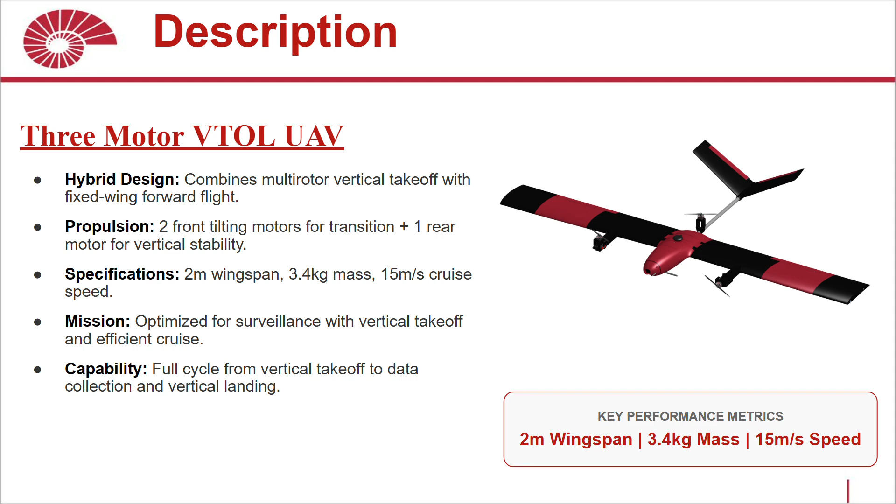Our mission is optimized for surveillance with a vertical takeoff and efficient cruise. Our capabilities are the full cycle from vertical takeoff to data collection and vertical landing. So here you can see our finished prototype within the lab of KU AVA at Koç University.

Our goals are stable and controlled flight, which we have achieved, and 20 minutes of endurance, which was partially achieved. We have achieved a 5-minute flight with battery usage of only 13%, which implies the capability to fly even more than 20 minutes. Total mass below 4 kilograms, which we ended up being 3.4.

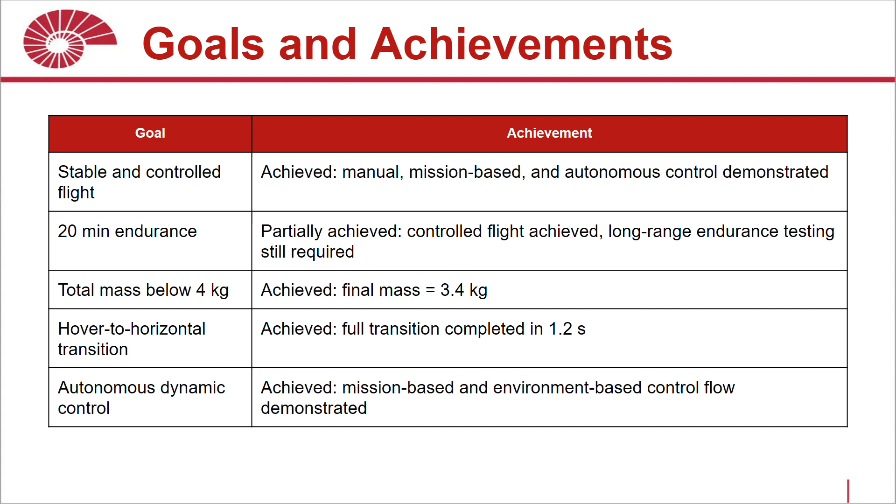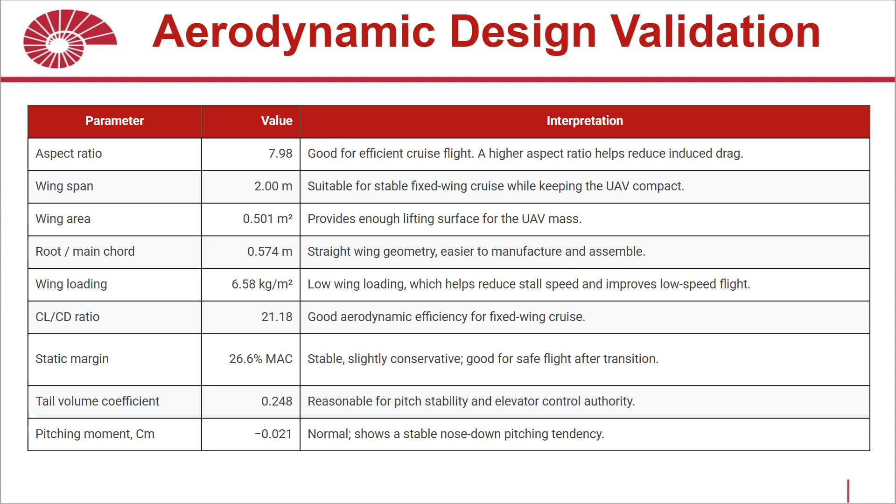Our aerodynamic design validations: our aspect ratio is quite on point, while the static margin is quite high, but at the same time, it provides a more steady flight, even though less maneuverability.

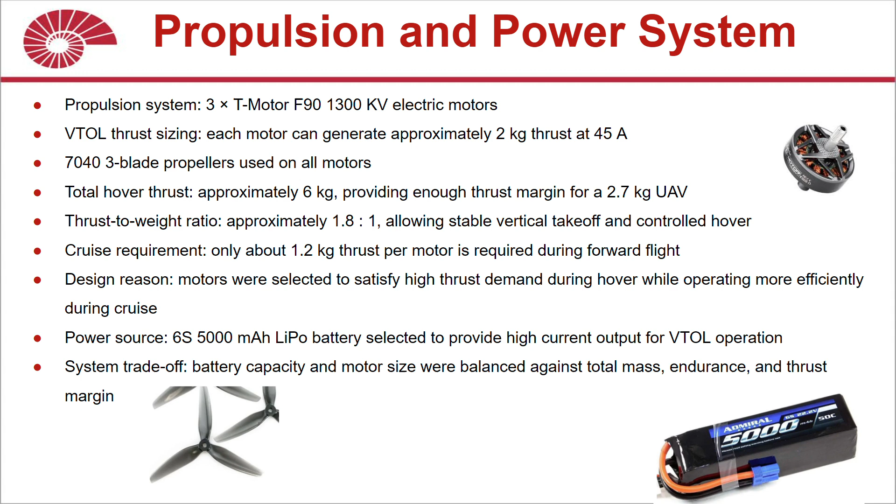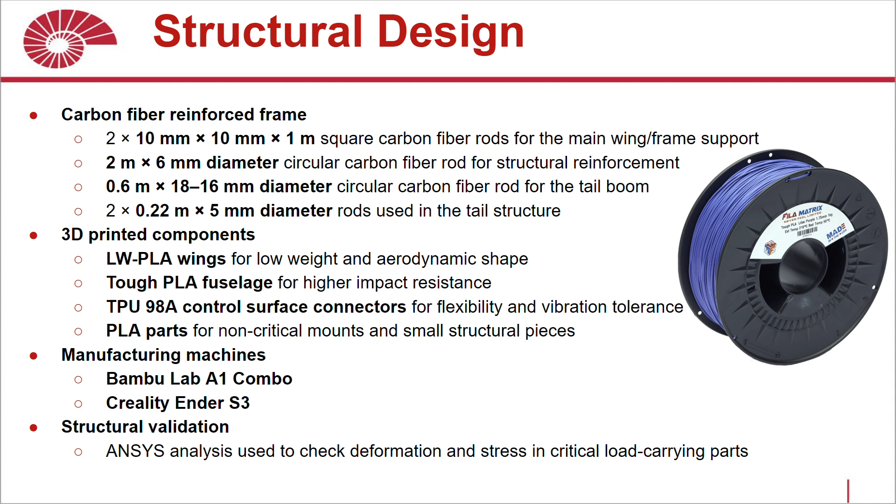Our structural design: we have used multiple different types of carbon fiber reinforcements, 3D printing filaments and components, manufacturing machines and structural validity. Everything was used with respect to their advantages from the engineering perspective in order to allow us to cut as much weight as possible and still obtain safe structural integrity within the plane itself.

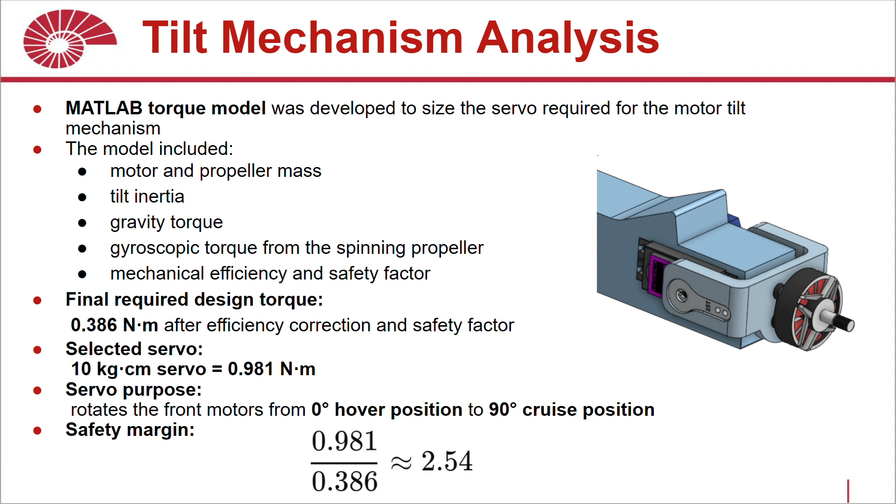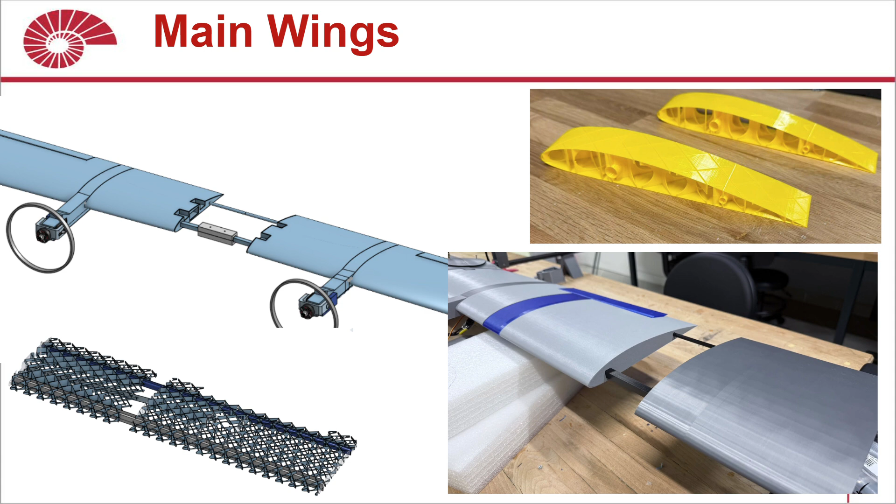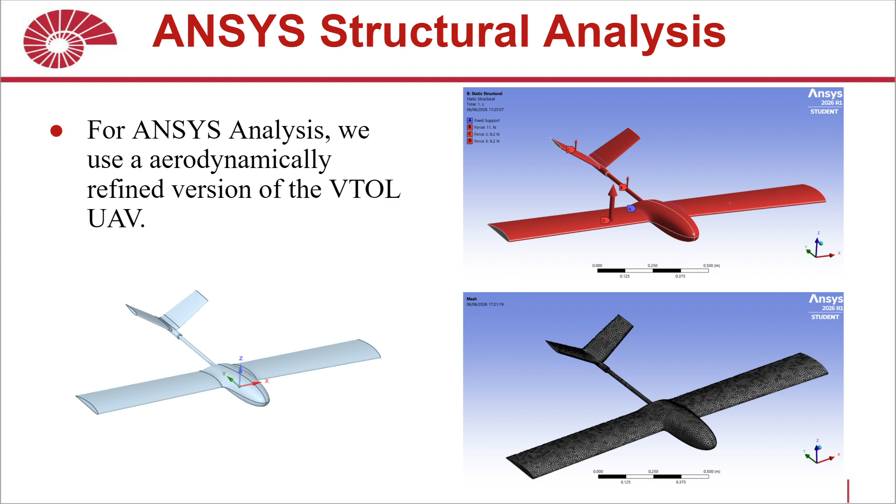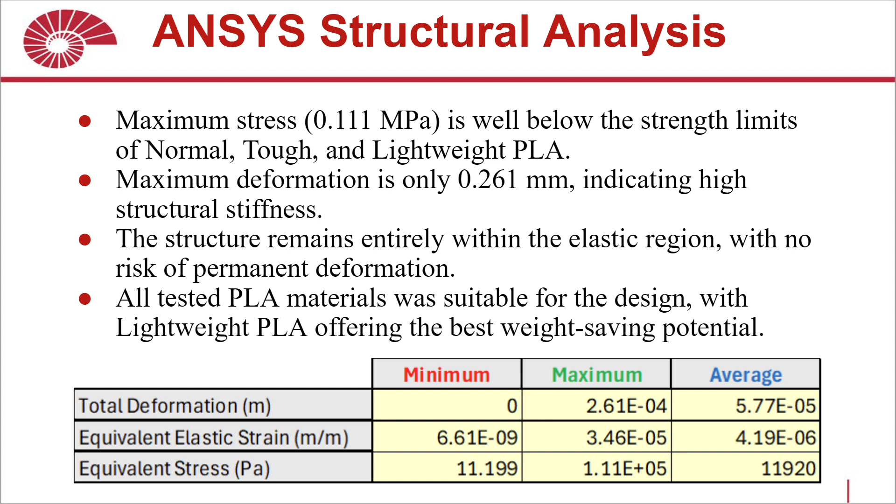Now regarding ANSYS analysis, here you can see the example of forces applied and the mesh. All of this was done at a cruising speed of 15 meters per second. As you can see, our total deformation and elastic strains are within the allowed levels of the materials used. Since we have confirmed that we are in the safe range, we can confirm that our structural stability and integrity is quite well designed.

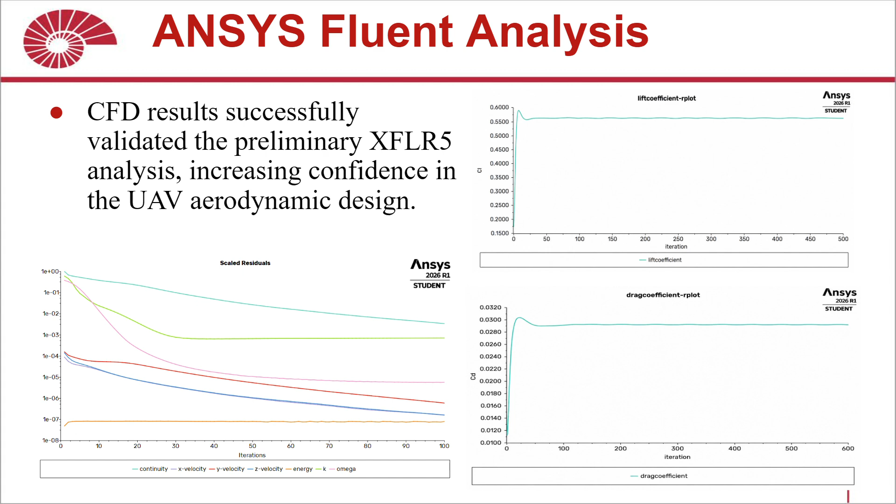Now regarding ANSYS Fluent, which was done through an Ahmed body inspired approach, it has shown that our CL and CD values are quite coherent with XFLR5 values. You can also see the velocity magnitude and the static pressure magnitudes, and you can see the differences between the top of the wing and the bottom of the wing. We can confirm that lift will be generated.

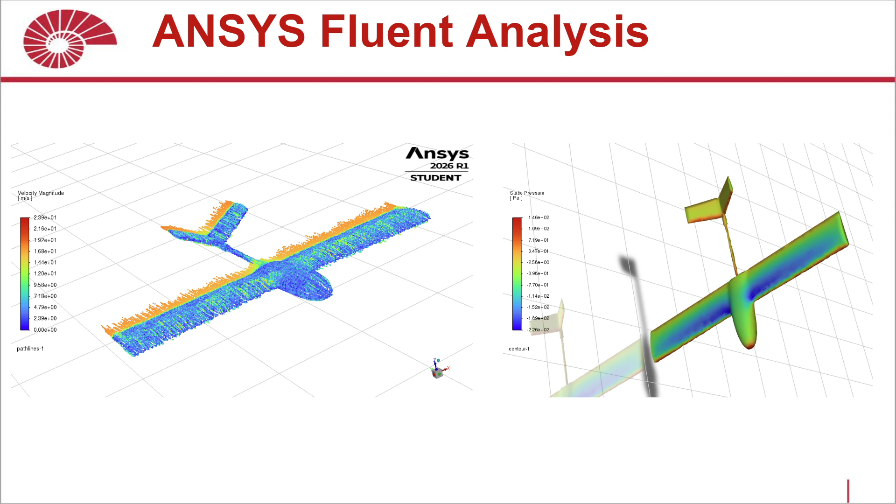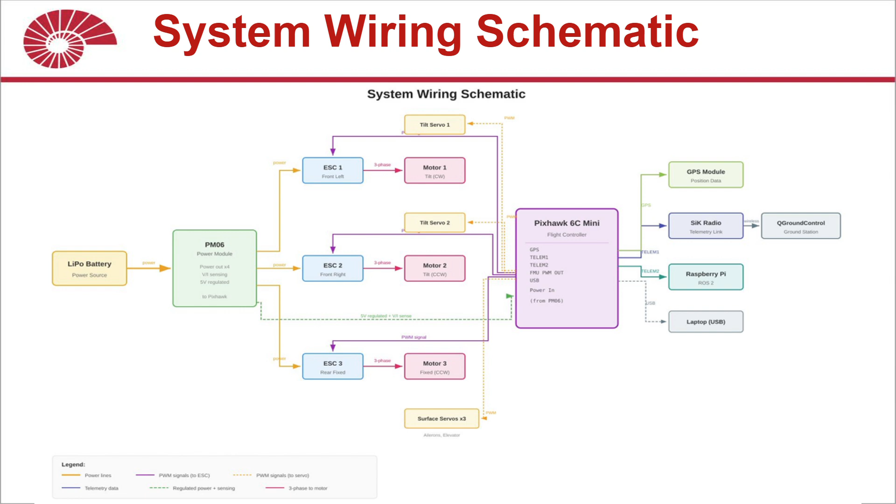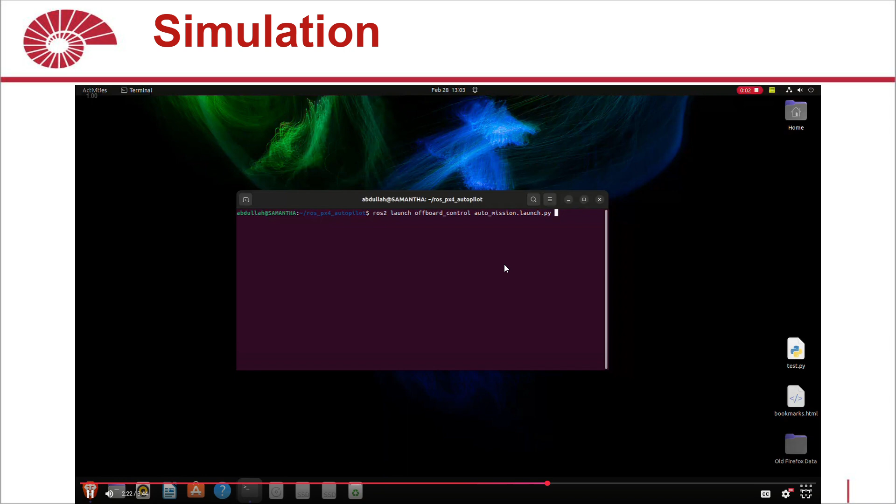System architecture, we're not going to go deep into this, but here are all the components that we have used and all the powering systems. Here is the whole wiring schematic and all the protocols that are running live on the plane. Regarding the simulation, you can see here how the Gazebo simulation is running. QGroundControl is also showing the mission, and we have live updates on the streams.

Now, regarding future improvements, we believe that wing reinforcement could be approached way better. The CG and CP values could be designed way better. The tilt servo: there have to be huge changes in the tilting mechanism. The wing internal structure could also be optimized and would allow us to obtain even more reduction in mass. The surface finishing, which could be a future epoxy finishing, is also quite interesting.